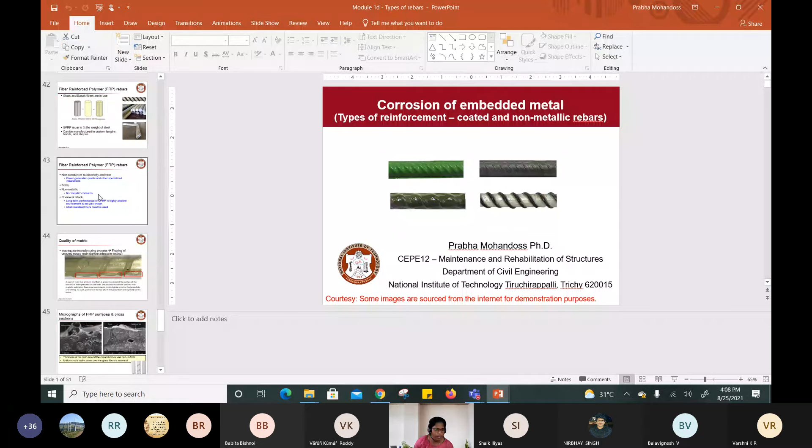Okay, so now let's look at the last type that we have, fiber reinforced polymer rebars. When we say fiber reinforced polymer rebars, this basically represents the non-metallic type of reinforcement. This is typically used when we have significant corrosion issues. So where you use normal steel rebars and expect them to corrode, this type of rebar will help sustain the environment for longer duration.

So typically the glass and basalt fibers are in use. Other than this, you have CFRP, carbon fiber reinforced polymers. So the most commonly used type is glass, and these type of FRP rebars are becoming more common in our construction practices.

So how do you prepare this type of FRP rebars? You have your fibers, and then you have a polymer matrix, and the fibers will be embedded into this to get the FRP composite. So basically, FRP composite is a combination of fibers embedded in the polymer matrix.

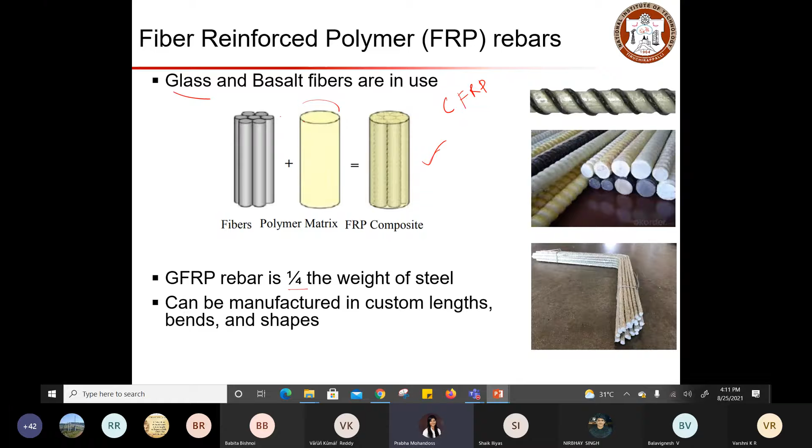Especially when you use GFRP rebars, the weight will be almost one fourth of what you obtain using steel reinforcement. And you have several advantages of customizing these FRP rebars - they can be manufactured in custom lengths, and you can bend them, or obtain any shape that you want for your application. These are some of the advantages of using FRP rebars as reinforcement.

When you look at the property of FRP rebars, these are generally non-conductive to electricity and heat. So in that case, this will be a better option. You can use this reinforcement when you need to construct power generation plants and other specialized installations where thermal conductivity and heat really become a challenging part. In such cases, fiber reinforced polymers provide better comfort and help you obtain accurate performance because they are non-conductive to electricity and heat.

But when you compare with steel, this is basically brittle in nature, so it does not fail in a ductile manner like steel rebar. So when you have FRP rebars, they will fail in a brittle manner. So you have to take good care while designing - when using FRP rebar, you have to limit the loads such that it stays within its yield limit. It should not go beyond yield, because going beyond yield will induce permanent deformation and lead to brittle failure.

So we need to avoid such type of brittle failure. While designing, you have to ensure that the design stays under yield condition, within the yield limit. And as I mentioned, since these are non-metallic, you will not face any metallic corrosion.

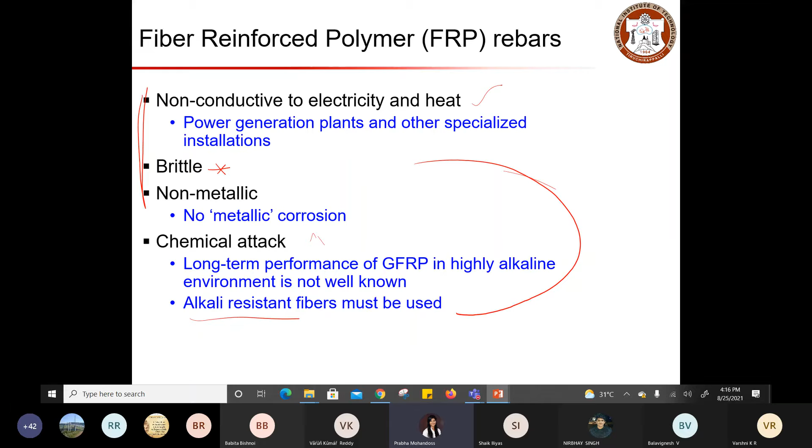Then the other point to note here is the quality of matrix. As I already mentioned, these fibers are bound together with the help of resin. In such cases, the uniformity of the epoxy resin plays a major role.

So a layer of resin that protects the fiber is present on most of the surface of the bars and is more prevalent on one side. This occurs because the uncured resin made by pultrusion flows downward due to gravity before entering the heated die and setting. So portions of the bar where the glass fibers are exposed can be found. In such cases, this becomes a weak region, and some of the glass fibers may get exposed because the epoxy is not adhered to the surface.

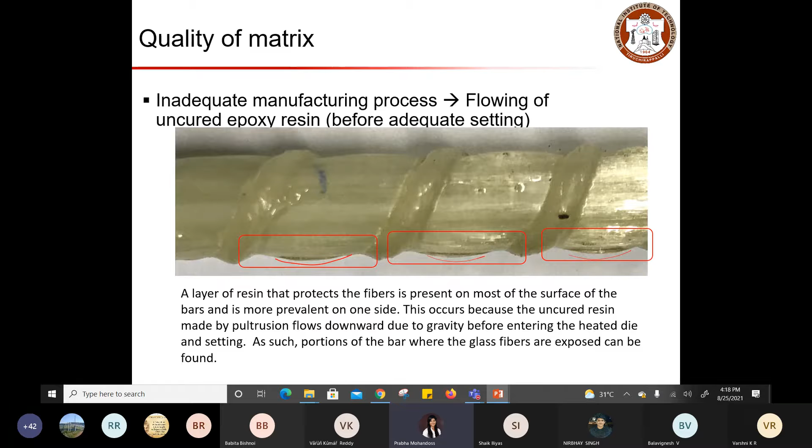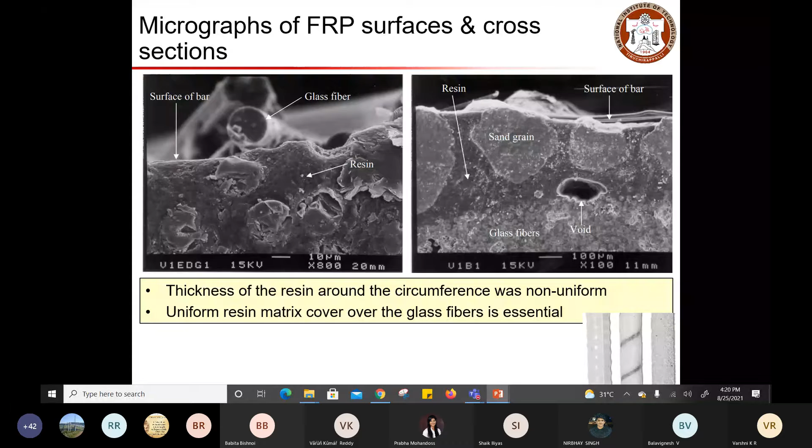And typically when we have steel rebars, what are the different types of failure mode that we expect?

What is the failure mode of FRP rebars? Ma'am, when you bond, shear. Shear failure, okay. Compared to steel, what is the nature of FRP rebar? Ma'am, it will be brittle. Yeah, exactly, brittle. So that is the other mode that I just expected you to say.

So it's brittle failure, brittle mode. So one is this cup cone failure pattern. Basically we can say these are failure patterns in general, failure modes. That is cup cone failure mode, under pure ductile failure, and then the shear failure, and you have brittle failure. So when you have brittle failure, the failure plane will be flat. There will not be any deformation. So the rebar will fail in this manner, you'll just see a flat surface, exact cut surface. Your one single rebar will become two portions with a flat surface.

Whereas when you have ductile failure, it will be a cup cone failure, the failure mode will be in the cup cone shape. And when you have shear failure, there will be deformation, but the failure plane will be at about 45-degree angle. So you will see such inclination, and then the rebar gets into two pieces, it gets ruptured into two pieces.

Whereas when we talk about FRP rebars, here shear and brittle failure plays a major role, so you observe a lot of shear and brittle failures. When the bond resin is not adequate or it is done poorly, then you observe debonded matrix, or you can see a lot of fibers coming out from the FRP composites as it is not able to take the load. In such cases, you observe debonding and shear failure of the matrix and glass fibers.

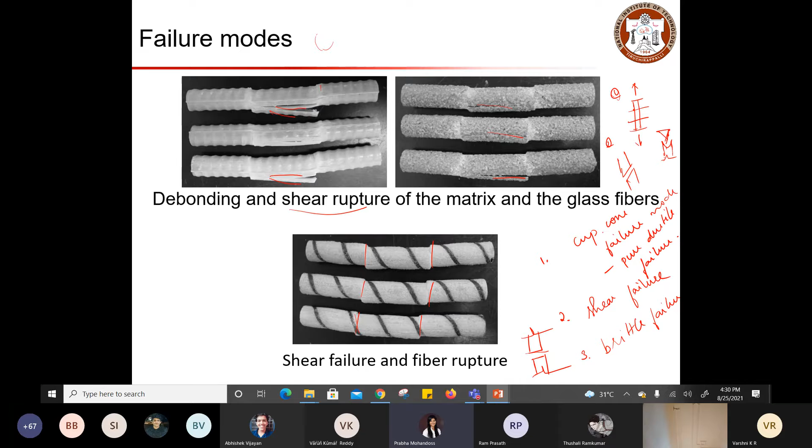So if the resin matrix is good under the load, then you observe shear failure, and after a certain loading point, it cannot take further load, so your fiber gets ruptured into pieces.

The only concern that we have with FRP rebar is its performance in the alkaline environment. That is, the effect of pH could affect the properties of your FRP rebar. Especially when we say properties, it mainly affects the shear modulus of your FRP rebar.

Just to have a sense of how this pH plays a role in affecting the performance of FRP rebar, here you can see different types of FRP rebar exposed to different pH level conditions. Here you have three types of FRP rebar: bar P basically represents 51 weeks, the gray one indicates bar V1 type, and this checked box indicates bar V2 type. All these basically indicate the exposure duration.

When you have unexposed FRP rebar, the shear modulus of elasticity is uniform for all cases. But when the pH value changes and the exposure duration changes, you can see a change in your shear modulus of elasticity. If the pH value is less, this bar V2 type shows higher shear modulus of elasticity. As the pH value increases, you see a reduction in the shear modulus of elasticity.

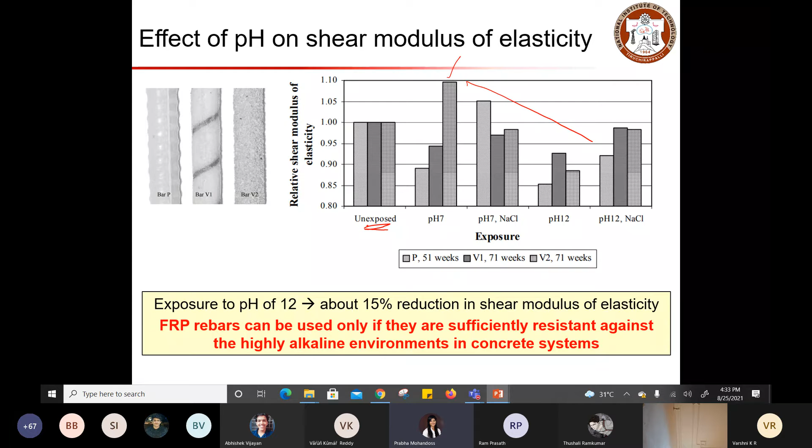Now to summarize things, there's a cost comparison of various rebars that we use in our construction practices: right from conventional uncoated TMT rebars, corrosion resistant steel, cement polymer composite coated steel, fusion bonded epoxy coated steel, galvanized and FRP rebars, and solid stainless steel. So you can see the cost increases as the property is modified based on our requirement.

The purpose of using steel rebars or different types of rebar is to enhance the overall performance of your structure, to achieve durability, and hence to achieve the serviceability of your structure. In most cases, the main issue we face with steel rebar is corrosion, so we choose rebars which have high corrosion resistance in such cases.

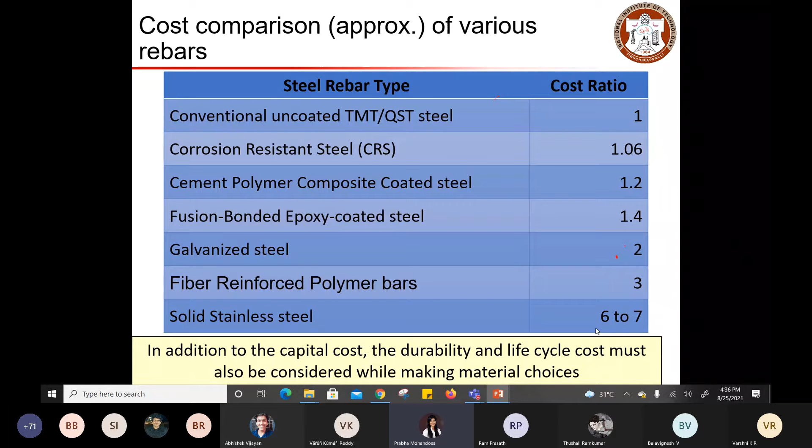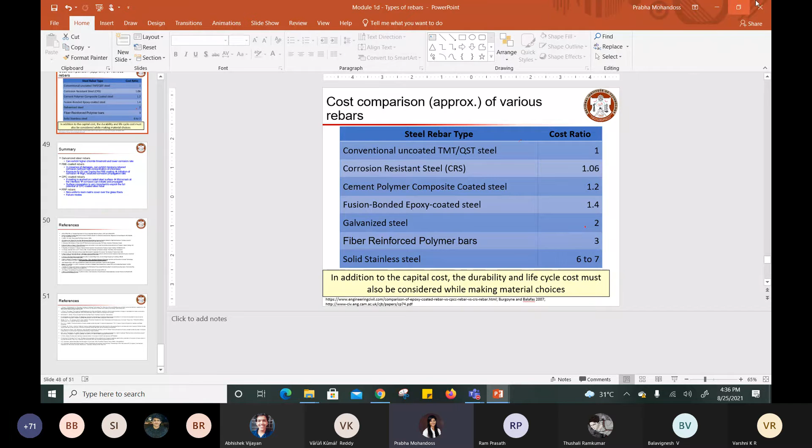I'll just touch on the last part of this module, that is corrosion in prestressed concrete. So far we have discussed in detail corrosions and the different types of corrosion we can anticipate in a reinforced concrete structure based on its environmental condition, and the different types of steel reinforcement we can use, along with their advantages and disadvantages. So now let us look at corrosion in prestressed concrete.

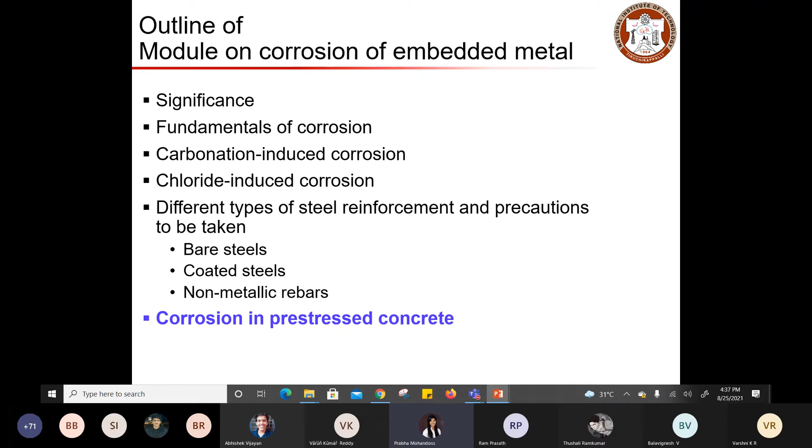So how different is this from the conventional reinforced concrete that we have discussed so far? First, let us look at why it is important to consider prestressed concrete and the significance behind that - the perception of good performance. I hope you are all aware of prestressed concrete.

We generally prefer using prestressed concrete over conventional reinforced concrete for large infrastructure projects, owing to its advantages, especially the design advantages. You can have thinner members, reduce the dead load, and have a longer span structure compared to conventional reinforced concrete.

But these types of structures became more significant in the late 90s. You can see this graph here, which basically shows the number of segmental bridges constructed in the USA over the decades. The number increased beyond the 1980s, and it became significant in 2000. So almost all the types of bridges we construct in recent times are based on prestressed concrete structures.

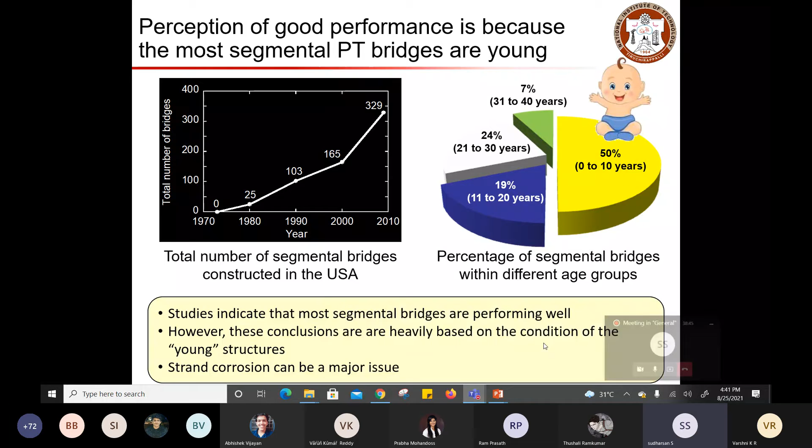So let me ask you, what is a pre-stressed concrete system? Already stressed concrete, right. So by its name, pre-stressed concrete is already stressed concrete. Why is it already stressed? To reduce the actual deflection caused by the load.

Yeah, you are right. So compared to conventional reinforced concrete, if you pre-stress it, you are basically reducing the actual deflection. But what is the concept behind it, how is it being reduced? By providing that pre-stress, there will be an upward deflection, so when we apply the load, it comes back to neutral form. Yeah, so you are basically inducing pre-compression in concrete because concrete is good in compression, weak in tension. We are basically utilizing the good property of concrete by inducing pre-compression. So when it is taking load, the pre-compression has to be decompressed, and only then will it get into the tension part.

So now, what are the two different types of pre-stressing that we can adapt in practice? So you are clear with the pre-stressed concept, you are pre-stressing it to reduce deflection by utilizing the compressive strength of concrete. When you pre-stress, you pre-compress the concrete, and that benefits you in reducing deflection by inducing hogging moments. So what are the different types of pre-stressing we can do? Pre-tensioning and post-tensioning, right? So are you aware of pre-tensioning and post-tensioning? No, ma'am. No, ma'am. All right.

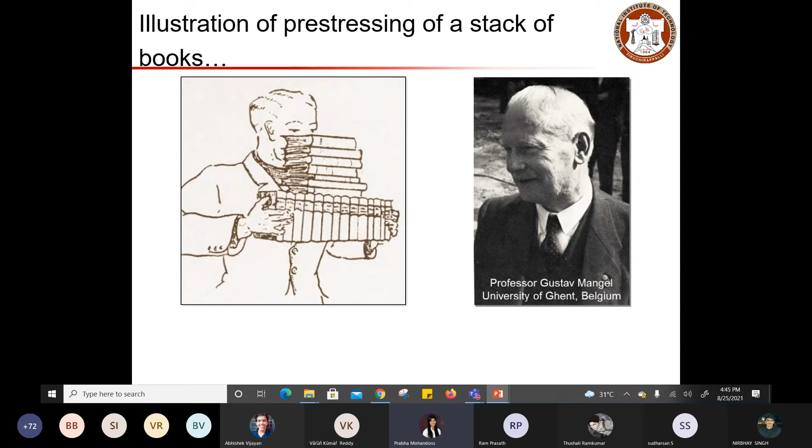But how are you going to induce the pre-compression?

So for that we have two types of systems. In one, you are going to stress the strand, tensioning the strands because steel is good in tension. Because you stress it, you are going to release the stress. Why release it? While releasing, the tension in the strand tries to induce compression in the concrete. Let me explain it in this way.

But when you are going to tension determines the system you are going to use. So in pre-tensioning, strands are stressed before the concrete is cast. And then you have the post-tensioning system, where strands are stressed after concrete has hardened.

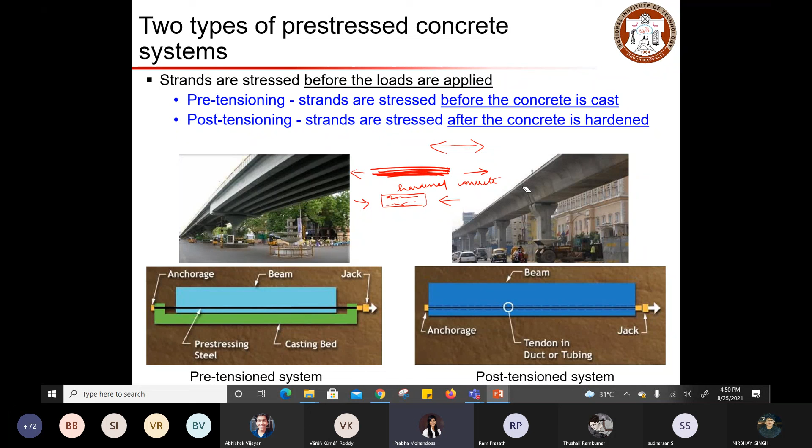So in general, when you have pre-tension and post-tension concrete systems, mostly you will see this type of segmental construction. So the construction will be like part of it will be constructed as segments. So you can see a lot of segmental construction when you use the post-tension system over the pre-tension system.